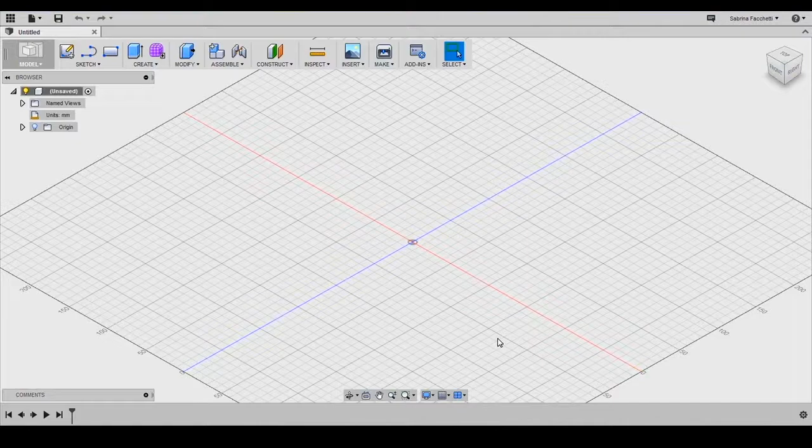To create the Pokeball, we need to create a sphere. I want to show you how to use the Revolve tool, so this time we will create the sphere starting from a sketch on the front plane. We draw a circle of 60 millimeters in diameter, which is about 2.5 inches. We divide it in two halves with a vertical line, and we delete the right one using the trim tool you find in the sketch section of your top menu.

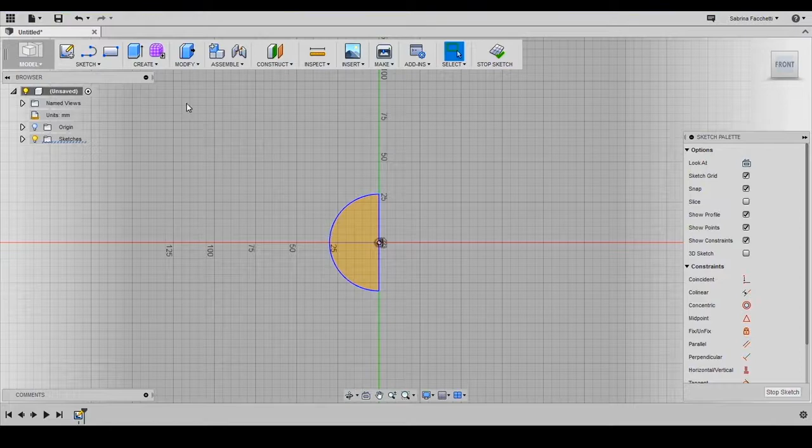Now we are ready to create our sphere. We go to the Create section of the top bar and choose the Revolve tool. We select our profile and set as axis the vertical green one. Set as angle 360 degrees if it's not already set by default. And here we are. Your sphere is done.

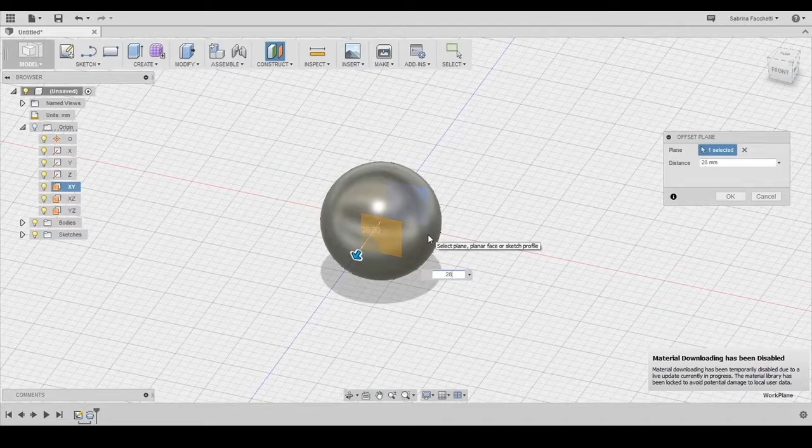To make our sphere a Pokeball, we need to add some details, like the horizontal band and the front button. We start creating the button. To do it, we need to create a new plane parallel to the front one. We can easily create a new plane using the Offset Plane tool in the Construction section of the top menu. We need to select the front plane, and to do it properly, we can use the left menu. Once the front plane is selected, you can set the distance at 28 millimeters, which means that this plane goes through the sphere. Now we can create a new sketch on this plane.

With the Circle tool, we create a circle of 22 millimeters in diameter, which is about 1 inch, and then extrude it. Make sure to set the direction as two sides, so we can cut in two directions. In the front direction, we set 3 millimeters of distance, and in the back one, 1 millimeter. Be sure also to set the operation to cut.

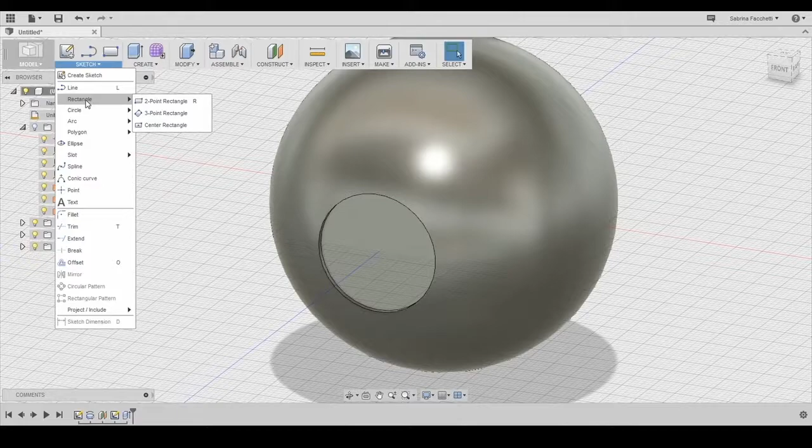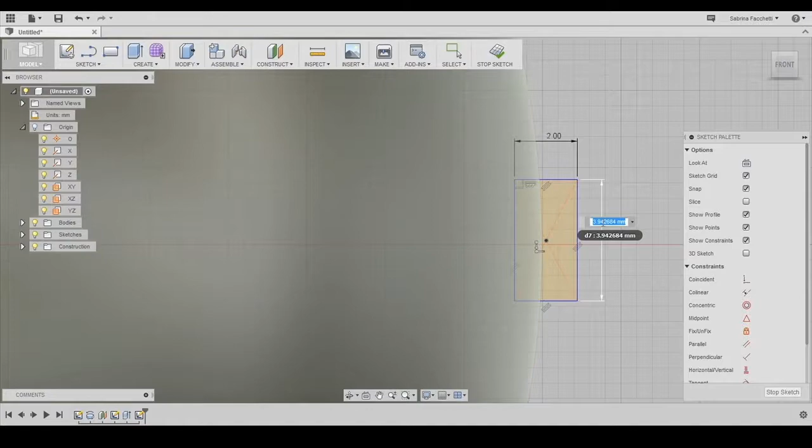We create a new sketch on the front plane using the Center Rectangle tool. We place the center of the rectangle tangent to the sphere on the right part, paying attention to put the center on the horizontal red axis. Using the Sketch Dimension tool, we set the rectangle at 2 millimeters by 8. In case the rectangle moved from its position while adding the dimension, just move it to put it back in the correct position.

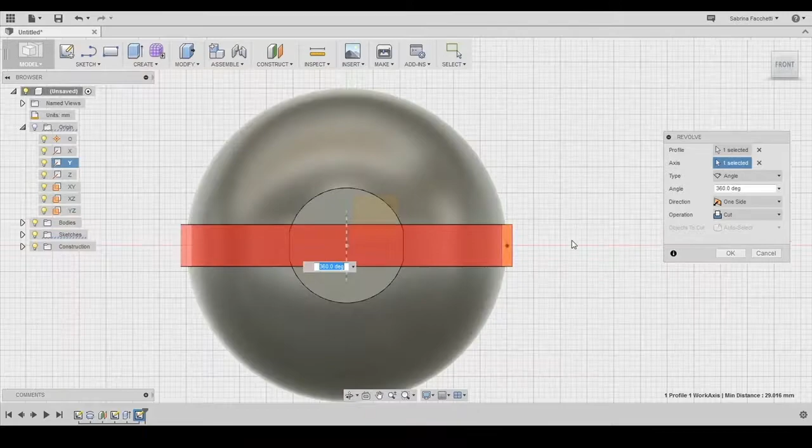Now we can use the Revolve tool. Select as profile the rectangle sketch and set as axis the vertical green one. Make sure to set the operation to cut and as angle 360.

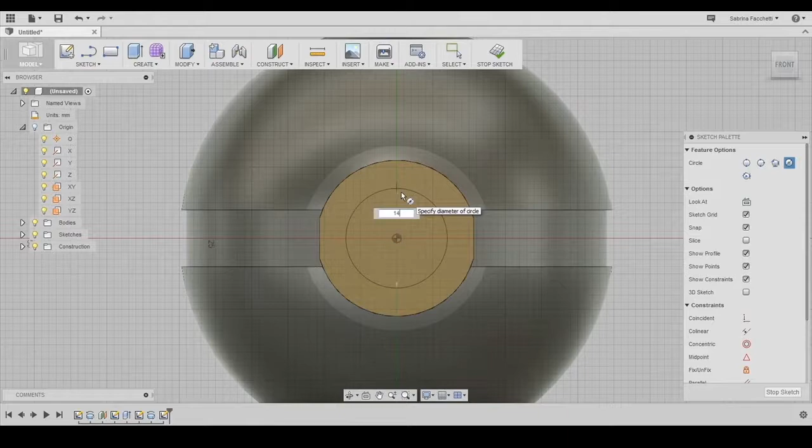Now we create the button of the Pokeball. We use the flat surface we created with the first extrusion as a plane to create the sketch we need for the button. Keep in mind that every flat surface can be used as a plane to draw new sketches and apply new functions. Using the center diameter circle you find in the sketch section of the top menu, draw a circle of 14 millimeters in diameter. Make sure to center it in the origin while creating the circle.

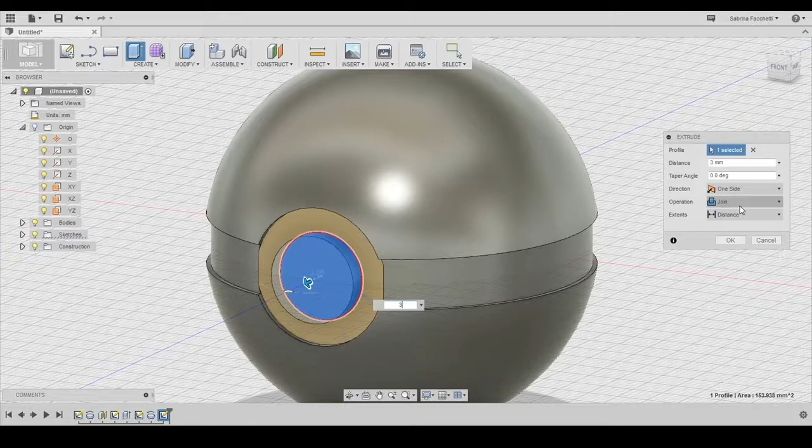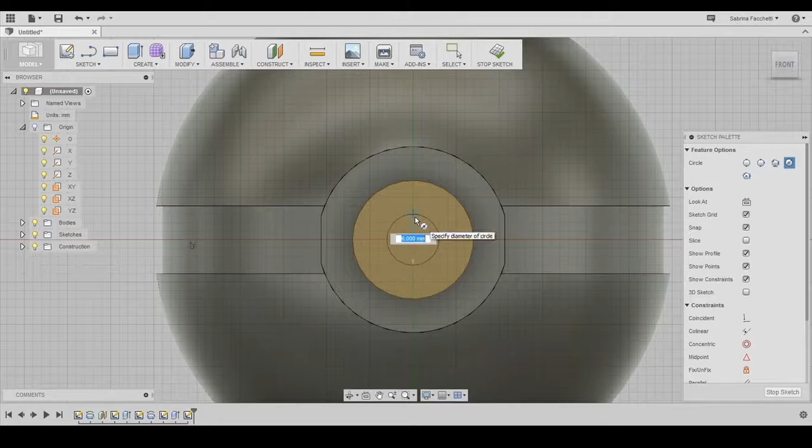We can now extrude the circle using the Extrusion tool in the Create section of the top menu. We set the distance at 3 millimeters and make sure to set the operation to join, to be sure to obtain a single body. Now we repeat the same operation we just did to create the top part of the button. We use the extruded surface as a plane to draw a new circle of 8 millimeters in diameter, and we extrude it, setting the distance at 2 millimeters, and once again setting the operation to join. Keep in mind that the more details you add to your creations, the better. In this way, your designs will be more realistic and interesting.

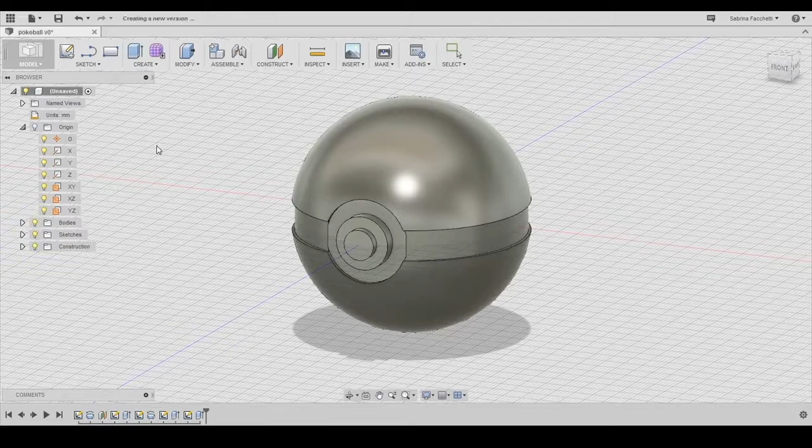Step 5. Now we save our Pokeball in the Autodesk Fusion 360 Cloud, clicking on the save icon. Once saved, the name you gave to the file will appear on the top of the left menu in your workspace. Now you can select the name, right-click or hold down Ctrl-click on Mac, and choose Save as STL.